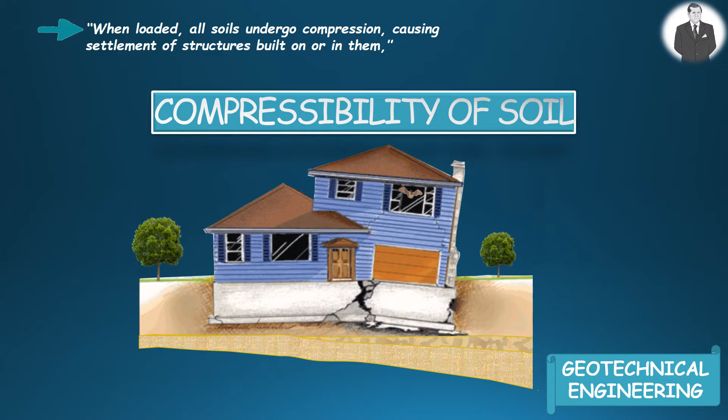With superimposed loading, soil layers experience a certain amount of compression due to several factors: the deformation of soil particles, expulsion of water and/or air from void spaces, and relocation of soil particles.

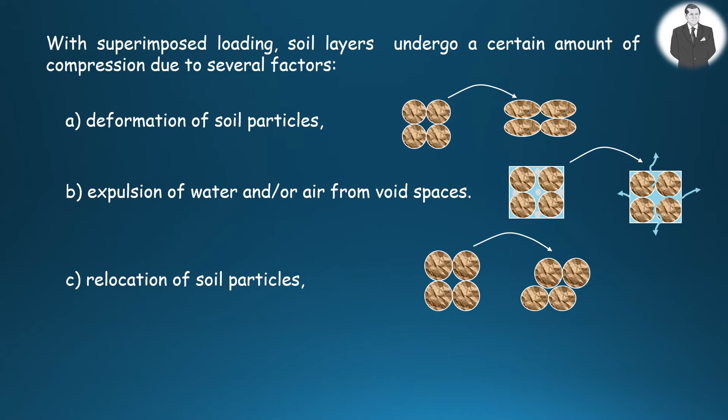Generally, soil settlement resulting from loading may be divided into three main categories: immediate or elastic compression, primary consolidation, and secondary compression.

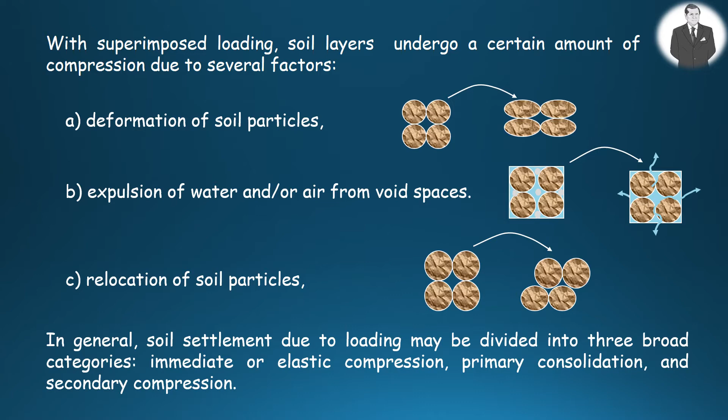Immediate settlement is owed to the elastic deformation of dry, moist, and saturated soils without any change in their water content. Immediate settlement calculations are usually based on equations derived from the theory of elasticity.

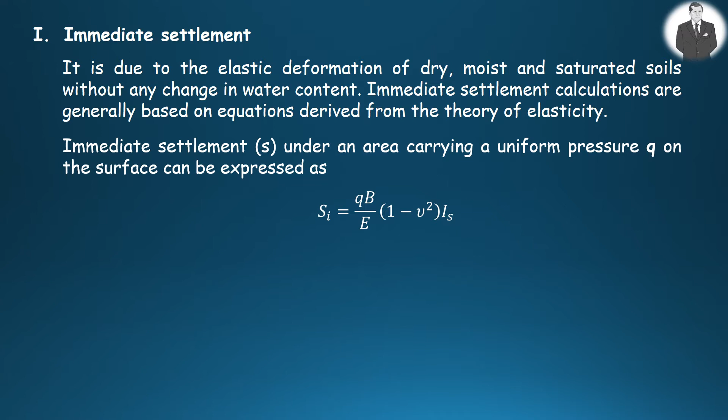Immediate settlement under an area bearing a uniform pressure on the ground surface can be obtained by this equation, where SI is the immediate settlement, Q is the uniform pressure acting on the ground surface, B is the width of the foundation or the diameter of circular foundation, E is the modulus of elasticity of soil, nu is the Poisson ratio, and IS is the influence factor depending on the shape of the loaded area.

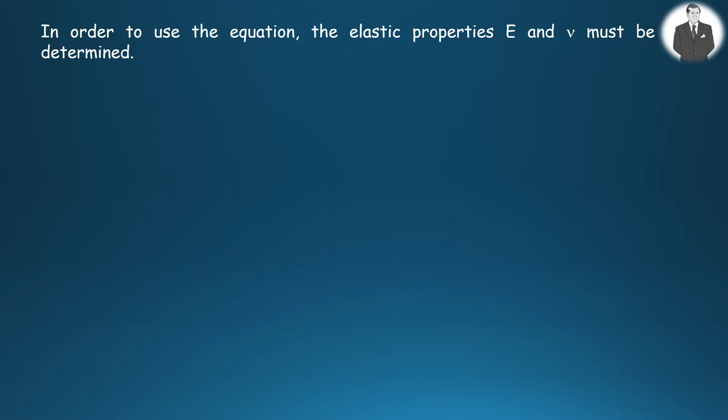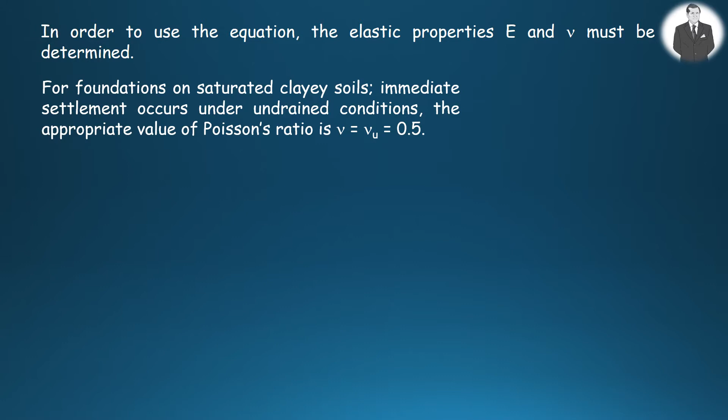To use the equation, the modulus of elasticity and the Poisson ratio must be worked out. For foundations resting on saturated clay soils, immediate settlement occurs under undrained conditions. The suitable value of Poisson ratio is then 0.5.

For other types of soils, typical values of Poisson ratio are presented in the table here. If you notice, it ranges from 0.2 to 0.5.

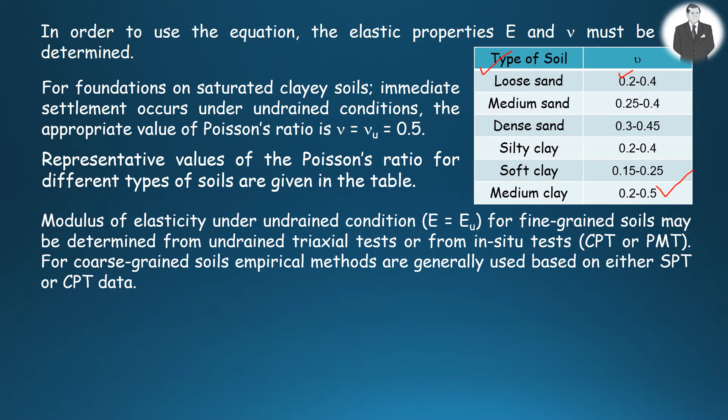Modulus of elasticity under undrained conditions for fine-grained soils may be determined from undrained triaxial tests or from in situ tests such as cone penetration test or pressure meter test. For coarse-grained soils, empirical methods are usually utilized based on either standard penetration test or cone penetration test data.

For most soils, the modulus of elasticity increases with depth, so use of a constant value of modulus of elasticity results in a conservative value.

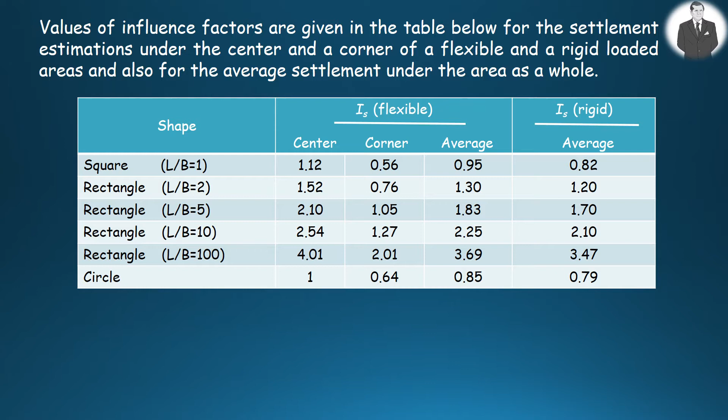For most cases in practice, simple settlement calculations are adequate on the condition that reliable values of soil parameters for the in situ soil have been obtained.

It should be appreciated that the precision of settlement predictions is much more affected by inaccuracies in the values of soil parameters than by shortcomings in the methods of analysis.

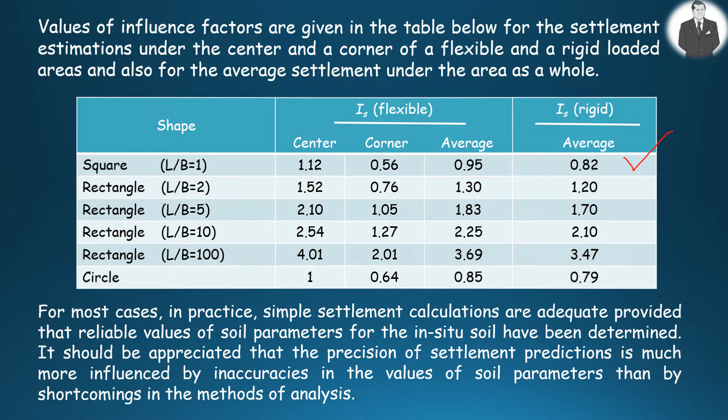Here is a practical example to illustrate how to calculate the immediate settlement, in other words, elastic settlement of foundation. A building foundation of 4 by 2 meters carrying a load of 1.2 meganewton is located at a depth of 3 meters in soil over a layer of clay 4 meters thick.

The value of modulus of elasticity under undrained condition for this clay layer is 50 megapascal. This layer is underlain by a second clay layer of 8 meters thick, for which the value of modulus of elasticity is 80 megapascal. The second layer is underlain by a rock layer.

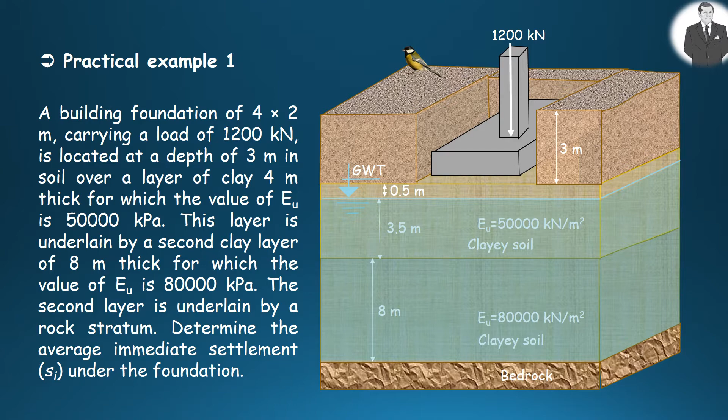You are asked to determine the average immediate settlement under the foundation.

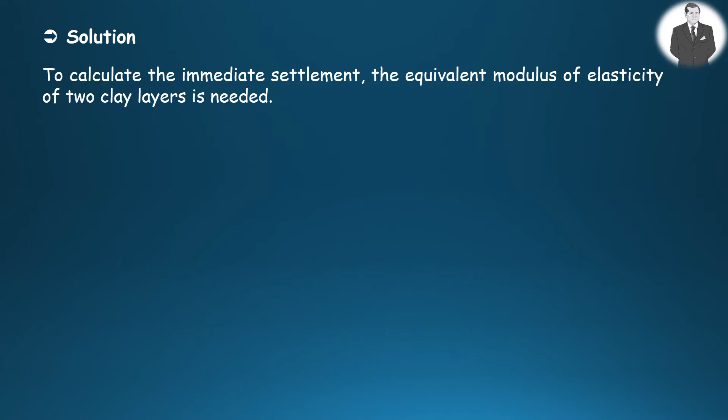This is 70 megapascal. Pressure at the base of the footing is the ratio between the load and the area of foundation, which is 150 kilonewton per square meter.

Since the clay soil layers are fully saturated, Poisson ratios for them can be taken as 0.5 as stressed earlier. To calculate the average immediate settlement, we need another parameter called influence factor, I sub S, as shown here.

This can be obtained from the related table shown earlier, based on the ratio between the length and the width of the foundation, which is 2. Now, putting all these related data into the equation as shown here, we can figure out the immediate settlement, which is about 4.2 millimeters.

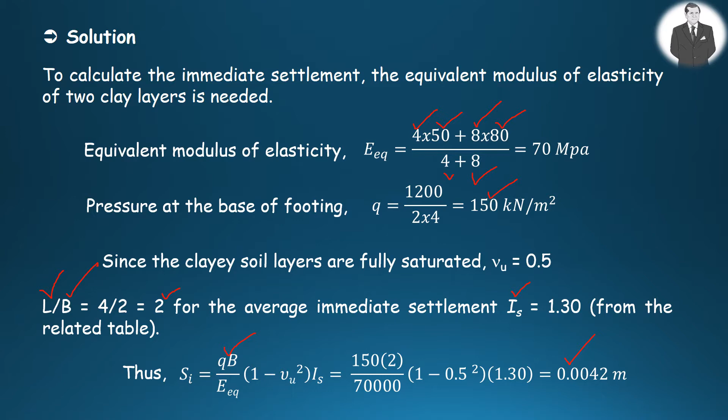Before learning how to calculate consolidation settlement, let us first understand the process of consolidation. Since soil is a multiphase system, a load applied to soil mass would be carried in part by the soil skeleton and in part by pore water. This sharing of the load can be typified by means of a simple analogy.

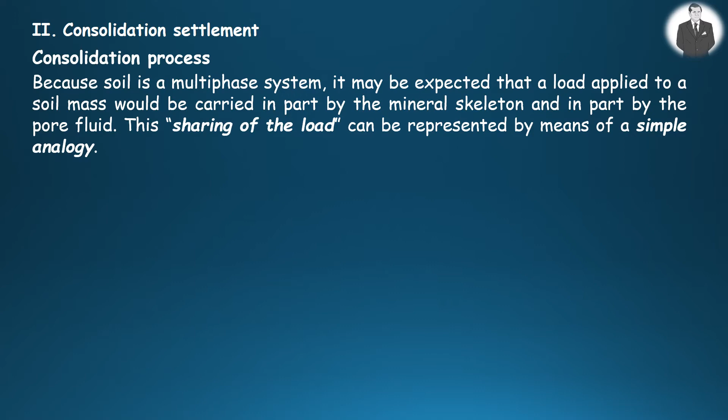As shown in the figure, the spring in the cylinder represents the compressibility of the soil skeleton, and the bore diameter of the valve represents the permeability of soil. The cylinder itself simulates the condition of no lateral strain in the soil mass.

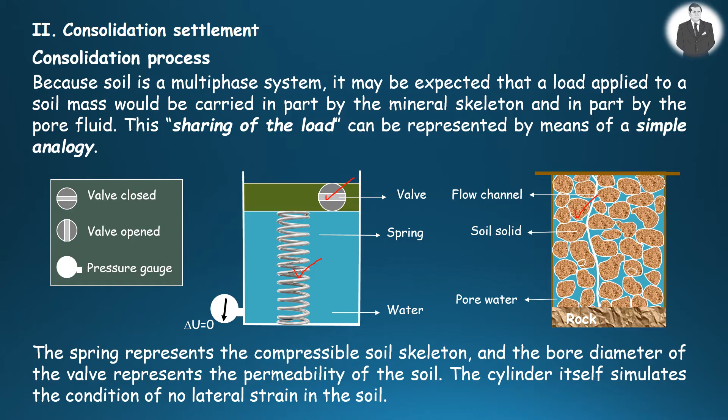Suppose a load is applied to the piston with the valve closed, as shown in figure A. The piston will not move as long as the valve is closed, and no load can be transmitted to the spring. The whole load will be carried by the water in the cylinder and none by the spring, because there is no drainage. This condition in the field is referred to as the undrained condition.

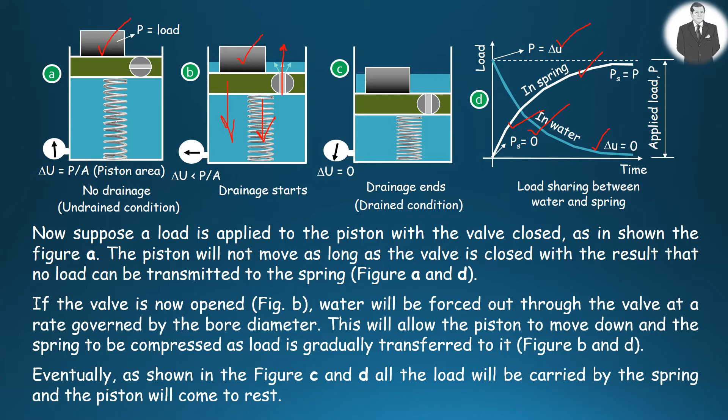Immediately after loading, there will be no drainage and no dissipation of excess pore water pressure, and therefore no transference of stress to the soil skeleton. Thus, the effective stress will be zero immediately after loading.

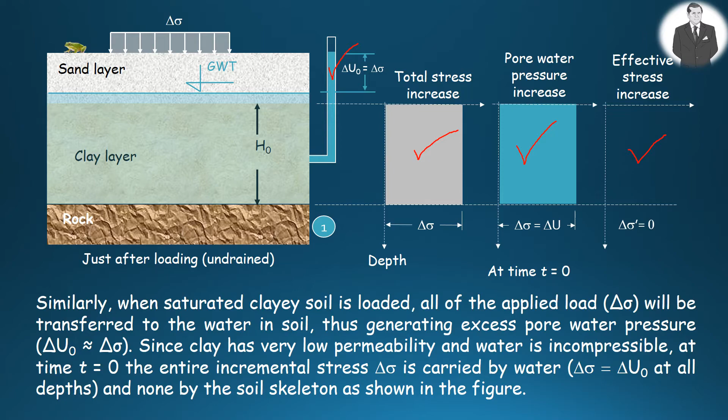With the lapse of time, which may take days, months, or even years, the excess pore water pressure will progressively reduce as the pressurized pore water flows out. While this happens, delta sigma will be gradually passed on to the soil particles, meaning that the effective stress increases, as shown in the figure here.

Nevertheless, the magnitudes of effective stress increase and excess pore water pressure at different levels will differ depending on the distance of the drainage path. In our case, there is only one-way drainage, at the top of the clay layer, and no drainage at the bottom because it is underlain by rock mass, which is impervious.

The excess pore pressures at upper levels of the clay layer are lower than those in the middle and at the bottom. Correspondingly, the effective stresses are higher at the upper levels but lower in the middle and at the bottom. This means that some of the stresses are passed on to the soil skeleton.

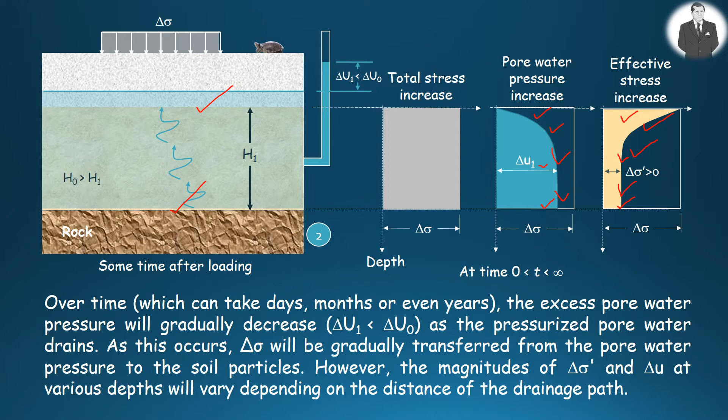Meanwhile, drainage continues and the settlement of the clay layer takes place slowly. Theoretically, at infinite time, when the excess pore water pressure is completely dissipated — in other words, when the pressurized pore water has entirely drained — the effective stress will increase by delta sigma, as illustrated in the figure. This means the stress acting on the ground surface is totally carried by the soil skeleton.

This progressive process of drainage under surface load application, and the related transmission of excess pore water pressure to effective stress, is the cause of time-dependent consolidation settlement in soil layers.

To estimate the settlement of clay layers in the field, a series of consolidation tests are performed in the laboratory using an oedometer, shown in the figure here. I will give you brief information about these tests. The details can be found in related textbooks or laboratory manuals.

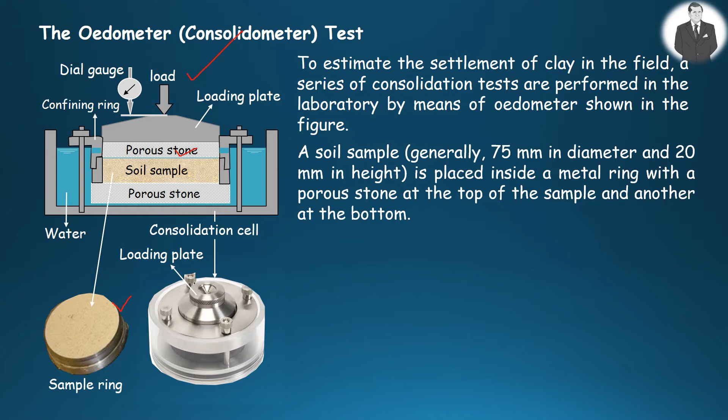A soil sample, usually 75 millimeters in diameter and 20 millimeters in height, is placed inside a metal ring as shown in the figure, with a porous stone at the top of the sample and another one at the bottom.

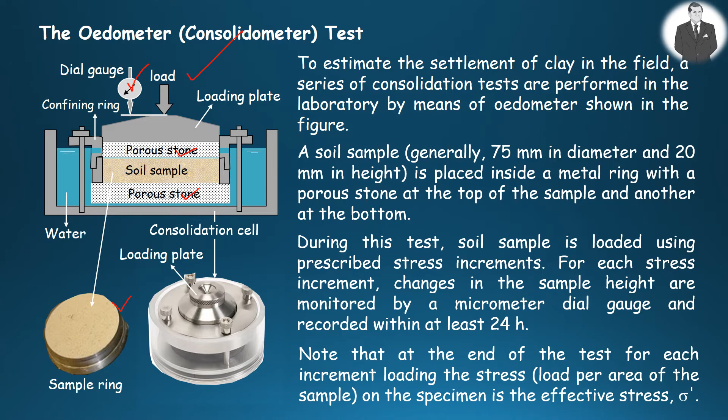During this test, the soil sample is loaded using prescribed stress increments. For each stress increment, changes in the sample height are monitored through a micrometer dial gauge mounted on the loading plate, as shown here, and recorded within at least 24 hours. It is important to note that at the end of the test, for each increment loading, the stress on the specimen is the effective stress.

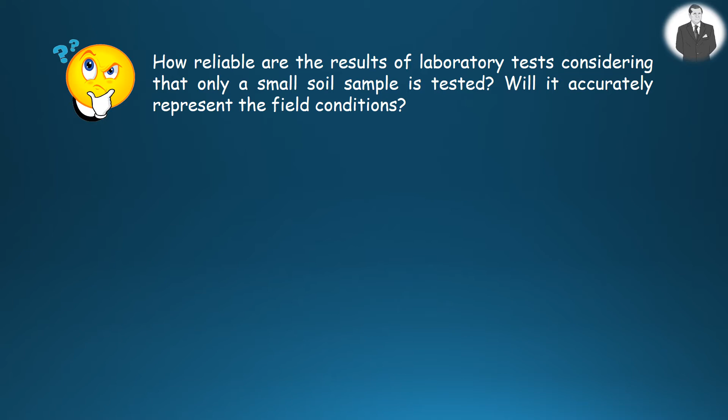The question is, how reliable are the results of laboratory tests, given that only a small soil sample is tested? Will it correctly represent the field conditions? Well, there is always apprehension about applying results from laboratory tests to solve large-scale field problems.

Engineering practice shows that the results obtained from laboratory tests may be very different from the field data. The problem results from the size of soil samples tested. Small laboratory samples do not generally represent the presence of larger voids or inclusions of other materials, which are prevalent in the field.

Let's get back to the subject. In a consolidation test, the void ratio at the end of each increment period can be computed from the displacement readings and either the water content or the dry weight of the sample at the end of the test.

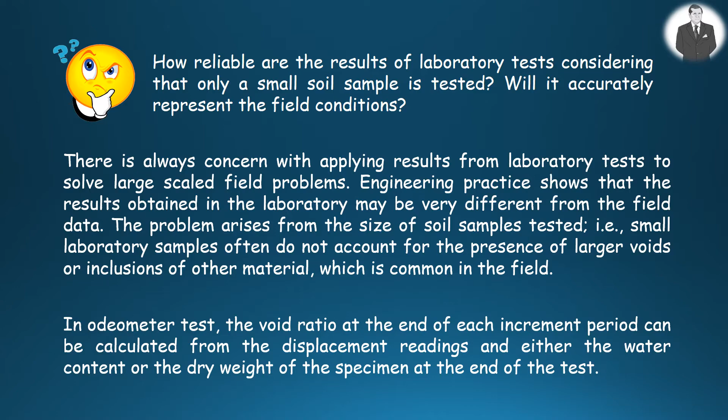E sub 0 is the initial void ratio at the beginning of testing, which is equal to E sub 1 plus delta E. E sub 1 is the void ratio at the end of the test. Remember that at the end of the test, the soil sample is still fully saturated, so the degree of saturation in this case is equal to unity. E sub 1 then can easily be obtained by W sub 1 times GS.

The laboratory data from oedometer tests are plotted as the effective stress versus void ratio using a logarithmic scale, as shown in the figure. If you notice, the curve consists of three parts: the recompression part, the linear part, and the unloaded-reloaded part.

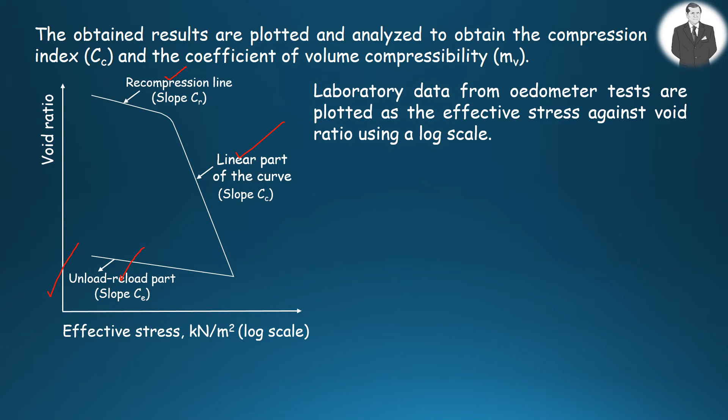The recompression part accounts for the soil disturbance. When the soil is removed from a certain depth in the field, there will be stress relief. Now, the compression index is obtained from the linear and steep part, which is also called the virgin compression line of the experimental curve. Let us consider two points, namely A and B, on the linear part of the curve.

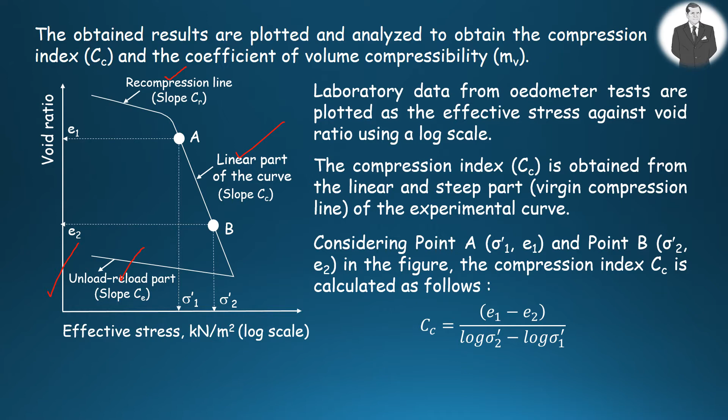The compression index is then defined as the ratio between delta E, which is the difference between void ratios corresponding to A and B, and log delta sigma prime, which is the difference between effective stresses corresponding to A and B points. If a soil is overconsolidated, it will be represented by a point on the unloaded-reloaded part of the E log sigma prime plot.

By the way, what is meant by overconsolidated soil? If the present effective stress is the maximum to which the soil has ever been subjected, the clay is said to be normally consolidated. On the other hand, if the effective stress at some time in the past has been greater than the present one, the soil is said to be overconsolidated.

The maximum value of effective stress in the past divided by the present value is defined as the overconsolidation ratio. A normally consolidated soil has an overconsolidation ratio of unity. Overconsolidated soil has an overconsolidation ratio greater than unity. The overconsolidation ratio can never be less than 1.

Overconsolidation is generally the result of geological factors, for example, the erosion of overburden due to glacier motion, wind, wave, or ocean currents, the melting of ice sheets and therefore reduction in stress after the glaciation, or permanent rise of the water table.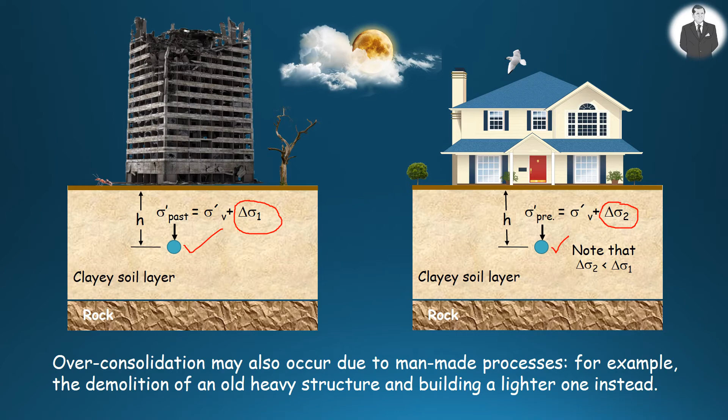Considering a point at depth H as shown in the figures, there is no change in the vertical effective stress due to self-weight of soil, but there is a change in the stress increase due to surface load. The stress increase delta sigma 1 due to a heavy structure is greater than the stress increase delta sigma 2 due to a lighter structure. In this case, the soil layer is said to be overconsolidated.

How can the maximum effective vertical stress that has existed on the soil in the past be known and found out? The maximum past effective overburden pressure is also named the pre-consolidation pressure. There is a simple graphic construction suggested to determine the pre-consolidation pressure from the laboratory E log sigma prime plot.

The procedure is as follows: initially we need to draw the E log sigma prime plot as shown in the figure based on the laboratory test results. The first step is, by visual observation, determine the point A of maximum curvature on the AB part of the E log sigma prime curve. Second step, draw a horizontal line through point A.

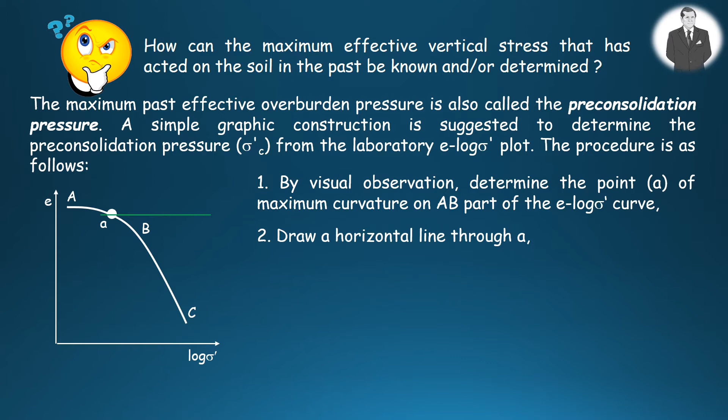The third step, draw the tangent to the curve at point A. The fourth step, bisect the angle between the tangent and the horizontal through point A. The fifth step, produce back the straight line part BC of the curve to intersect the bisector. And finally, draw the vertical through the point of intersection of the bisector to obtain the value of sigma C prime. That's it.

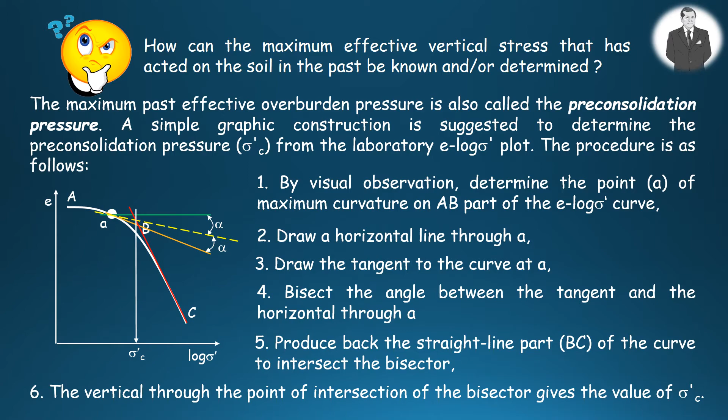Whenever possible, the pre-consolidation pressure for an overconsolidated clay should not be exceeded in construction. If it is exceeded, then the compression will be large.

Now the question is, what is the engineering approach to deal with consolidation in practice? There are two main important questions which engineers need to find solutions for. The first one is, what will be the maximum settlement? And the second one, how long will it take? The following sections will discuss how to calculate soil settlements and time of consolidation.

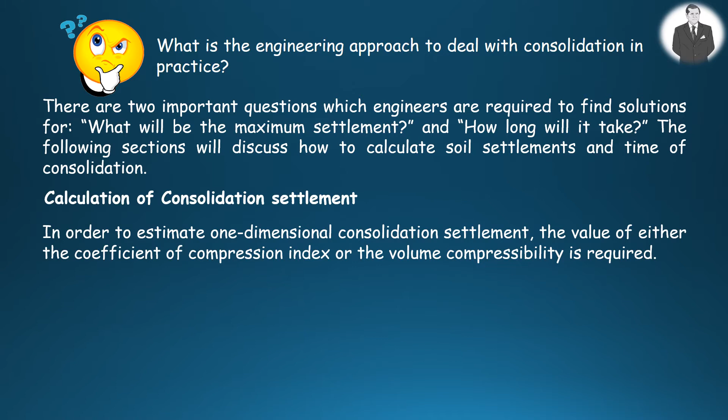Let us consider a site comprising a normally consolidated soil, on which we wish to construct a structure, and assume that the increase in vertical stress due to the structure in the middle of the soil layer is delta sigma. In this case, the final vertical stress will be sigma 0 prime plus delta sigma. Sigma 0 prime is the effective vertical stress due to self-weight of soil in the middle of the soil layer.

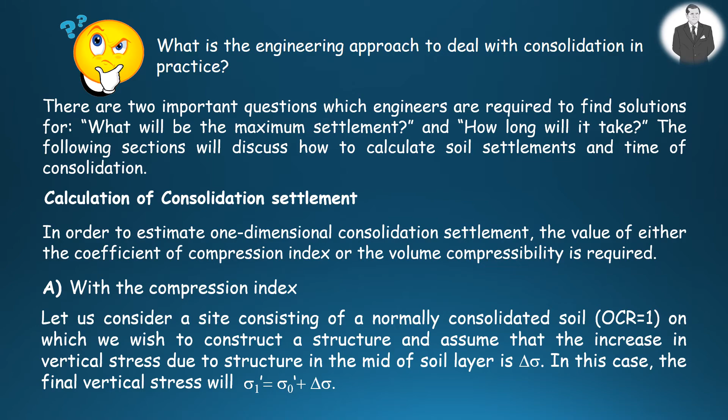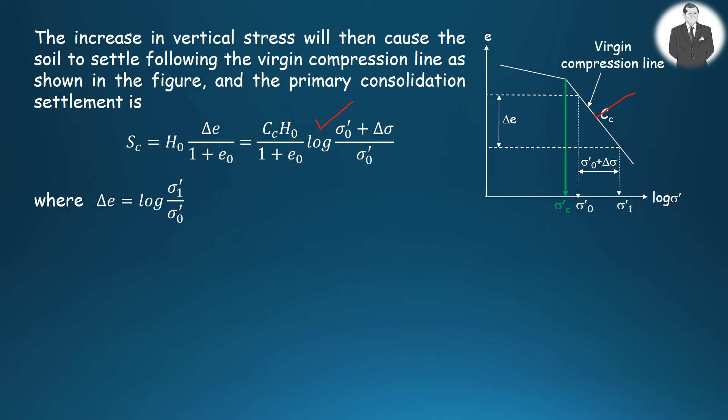The increase in vertical stress will then lead to soil settlement following the virgin compression line as shown in the figure. The primary consolidation is then obtained by the equation given here, where delta E is equal to log sigma sub 1 prime over sigma sub 0 prime.

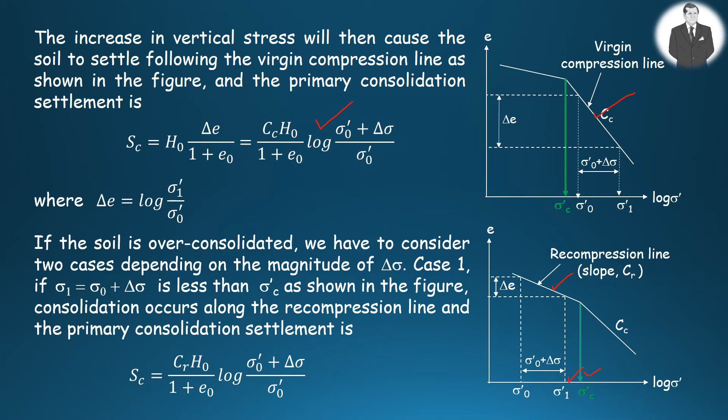If, on the other hand, the soil is overconsolidated, we have to consider two cases based on the magnitude of delta sigma. Case 1: if sigma sub 1 is less than the pre-consolidation pressure, as shown in the figure here, then consolidation occurs along the recompression part, and the primary consolidation in this case is obtained by the equation given here.

H sub 0 is the initial thickness of the soil layer subjected to consolidation. Sigma sub 0 prime is the initial effective stress in the middle of the soil layer before structural load. Delta sigma is the stress increase in the middle of the soil layer due to structural load, and sigma sub 1 prime is the final effective vertical stress in the middle of the soil layer after structural load. Delta E is the difference between the initial and final void ratios before and after structural loading.

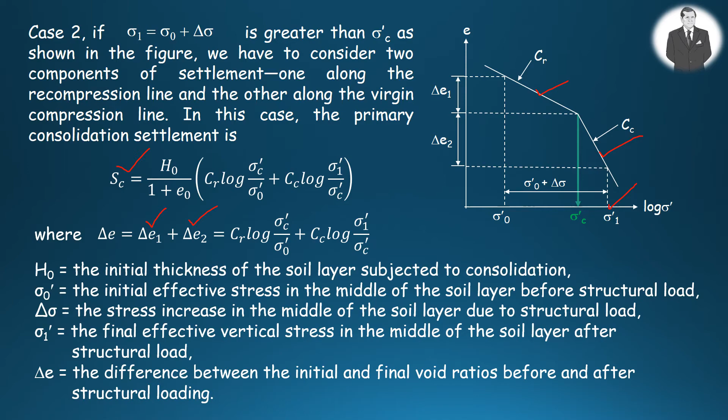In the calculation of primary consolidation settlement, you may need to follow a procedure outlined here. The first step is to calculate the current vertical effective stress and the current void ratio at the center of the soil layer for which settlement is needed.

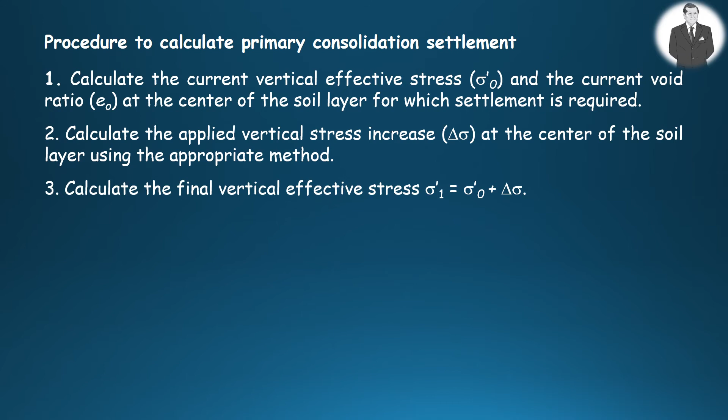The second step is to compute the applied vertical stress increase due to surface load at the center of the soil layer using the suitable method. The third step is to calculate the final vertical effective stress, which is equal to present vertical effective stress plus the stress increase due to surface load. The fourth step is to compute the primary consolidation settlement.

If the soil is, on the other hand, over-consolidated, in this case, the primary consolidation settlement can be computed using the equation given here. Notice that instead of Cc, we use Cr, which is the slope of the recompression part of the E log sigma prime plot, because the pre-consolidation pressure in this case is greater than the present vertical effective stress.

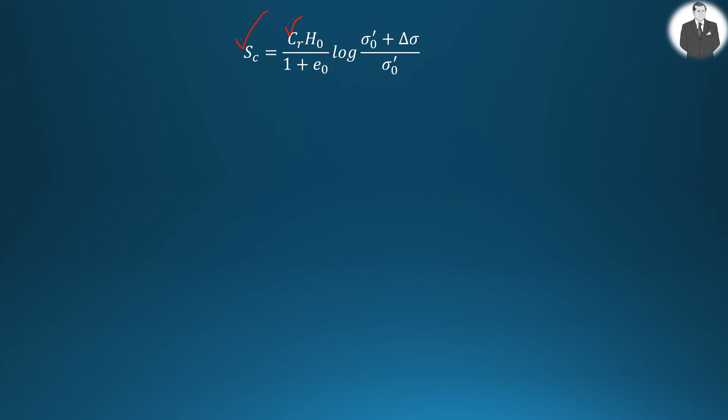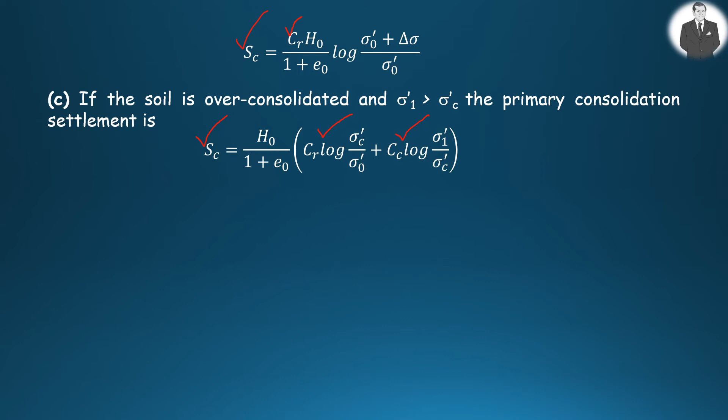If the soil is overconsolidated and the final effective vertical stress is greater than the pre-consolidation pressure, the primary consolidation settlement can be calculated using the equation given here. In this equation, we have two parts, namely the recompression part and the virgin compression part of the E log sigma prime plot.

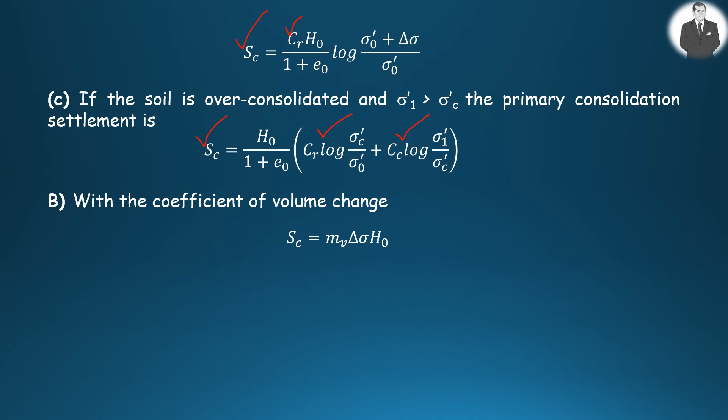It is also possible to calculate the primary consolidation settlement by using the coefficient of volume change. In this equation, H sub 0 is the initial thickness of the clay layer, and delta sigma is the change in vertical stress that brings about consolidation.

Although compression index is constant, the coefficient of volume change varies with stress level. To take into account the variation of coefficient of volume change and delta sigma with depth, the graphical procedure can be adopted to calculate the primary consolidation settlement.

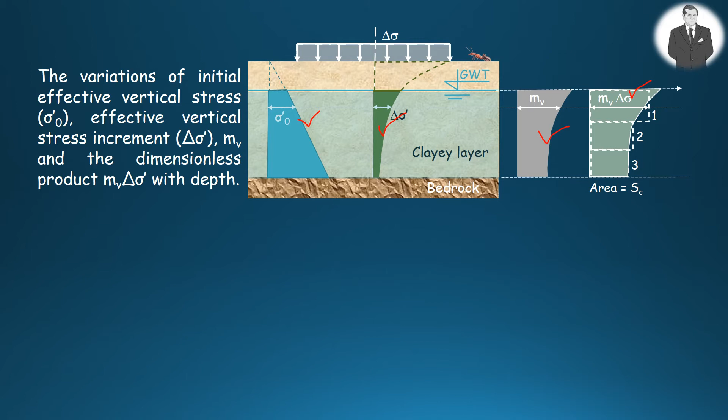In the figure here, you see the variations of initial effective stress increment, the coefficient of volume change, and the dimensionless product of m sub v times delta sigma prime with depth.

In an alternative way, the layer can be divided into sub-layers, and the product m sub v times delta sigma prime can be determined at the center of each sublayer. Each product is then multiplied by the suitable sublayer thickness to obtain the sublayer settlements. The settlement of the whole layer is then equal to the summation of the sublayer settlements.

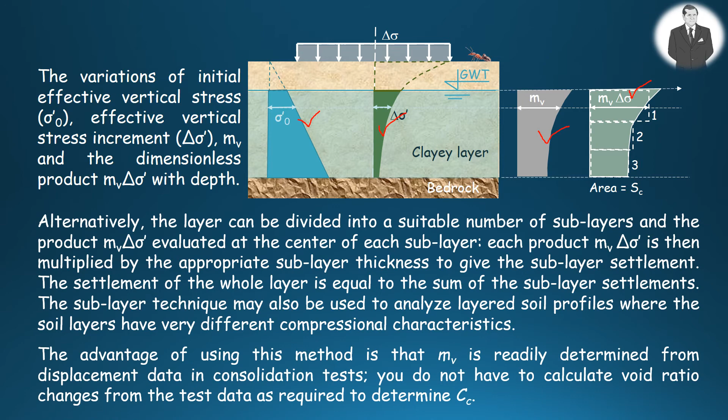This technique may also be used to analyze layered soil profiles where the soil layers have different compressional properties. The advantage of using this method is that the coefficient of volume change is readily determined from the displacement data in consolidation tests.

So you don't need to calculate void ratio changes from the test data as needed in the determination of compression index.

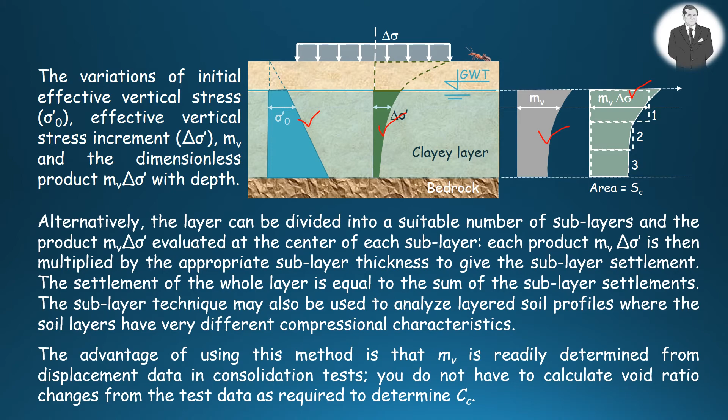Secondary compression settlement is the change in the volume of soil resulting from the readjustment of the soil structure after the primary consolidation has ended.

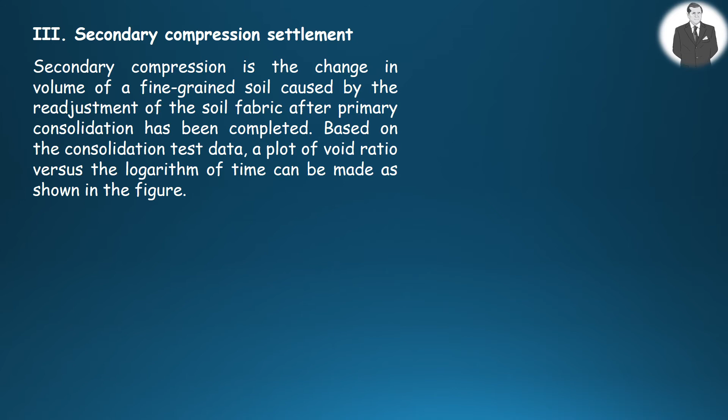Based on the consolidation test data, a plot of void ratio versus the logarithm of time can be made as illustrated in the figure. Now, the primary consolidation is assumed to end at the intersection of the projection of the two straight parts of the curve as you see in the figure.

Now then, the secondary compression index is defined as the slope of the secondary compression part between selected time intervals. Thus, the secondary compression settlement can be computed by means of the equation given here.

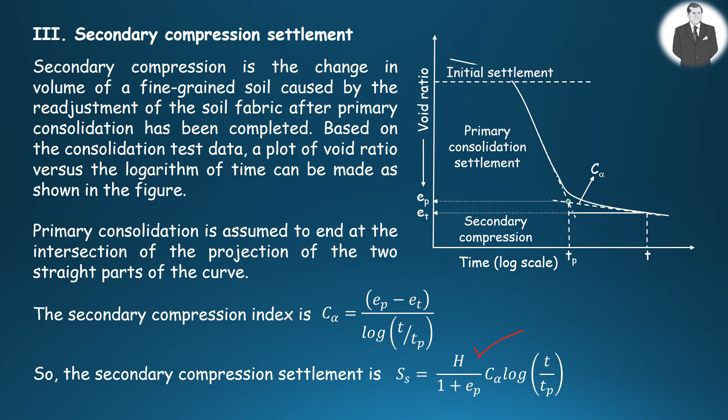Where E sub P is the void ratio at the end of primary consolidation, E sub T is the void ratio at time T on the secondary compression part, H is the thickness of the clay layer at the beginning of secondary consolidation, and T is the time at which secondary compression is needed.

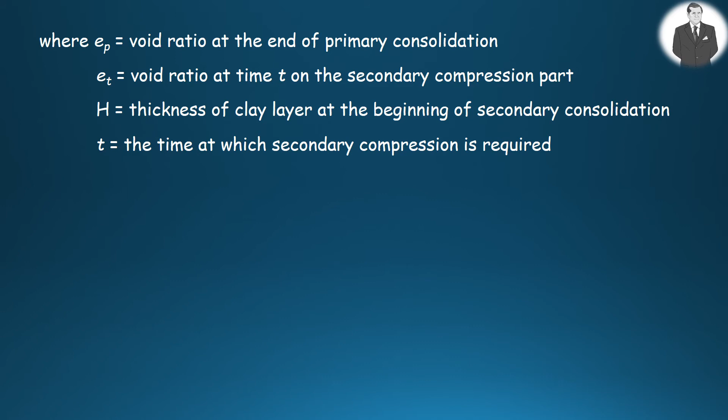The total settlement of a foundation can then be given as the summation of elastic settlement, primary consolidation settlement, and the secondary compression settlement.

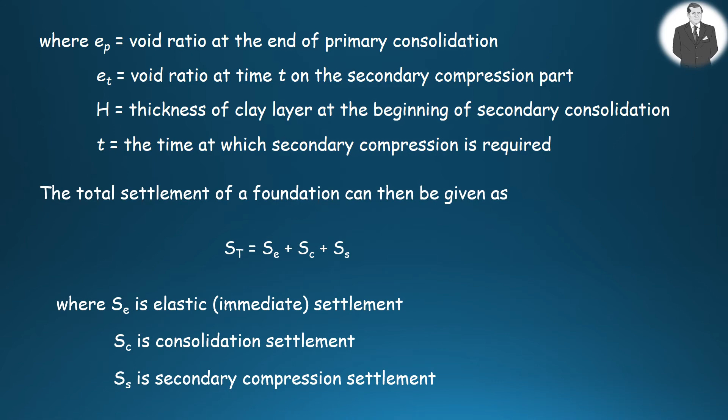The building's raft foundation is rectangular, with a width of 30 meters and length of 60 meters. The laboratory tests conducted on soil samples collected from the middle of soil layers at site through boring reveals the following data.

The unit weights of sand above and below the groundwater level are 16 kilonewton per cubic meter and 18 kilonewton per cubic meter respectively. The saturated unit weight of the alluvial clay is 17 kilonewton per cubic meter.

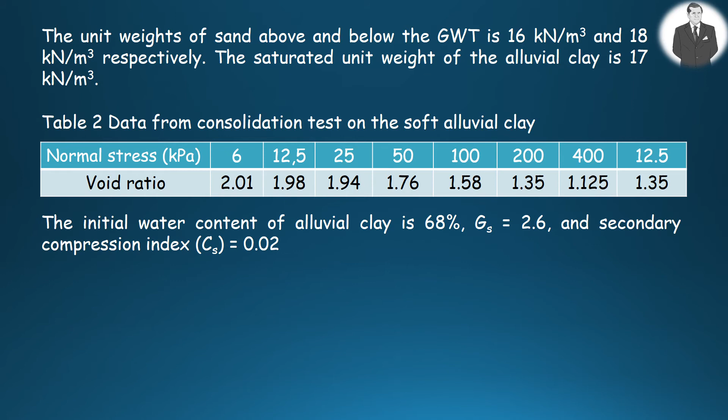Table 2 shows data from the consolidation test run on the soft alluvial clay. The initial water content of the clay layer is 68%, the specific gravity is 2.6, and the secondary compression index is 0.02.

Question 1: What would be the primary consolidation settlement in the clay layer caused by the construction of the hospital building? Question 2: What would be the total settlement of the clay layer 10 years after the completion of primary consolidation settlement? Note that the time for completion of primary consolidation settlement is 2 years.

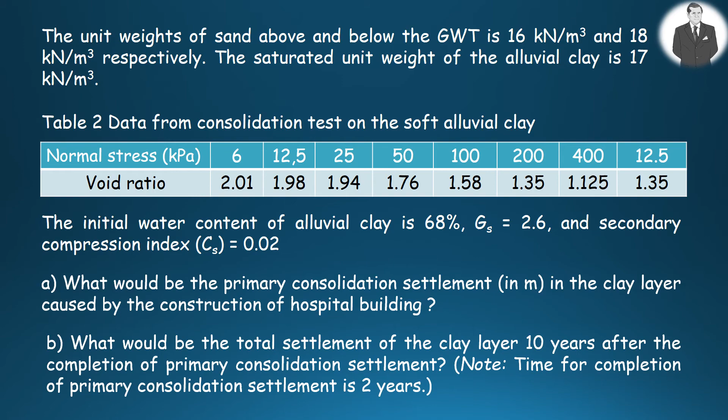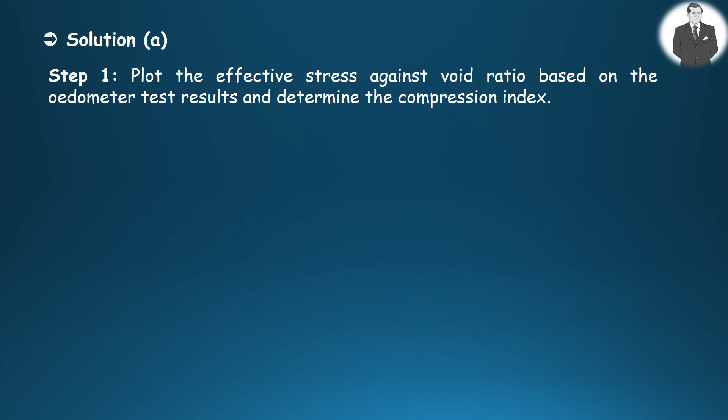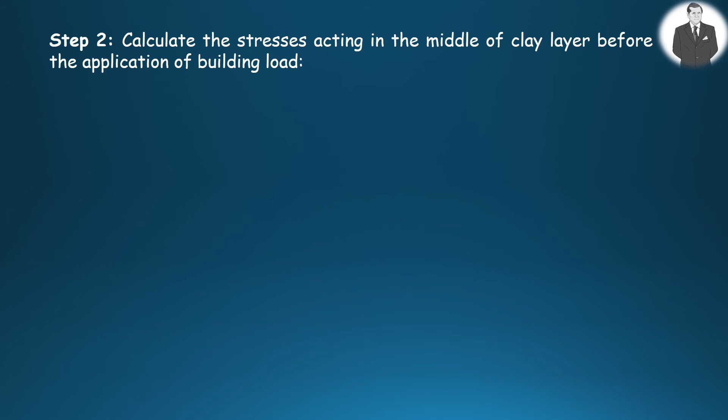The second step is to calculate the stresses acting in the middle of the clay layer before the application of the building load. So the total vertical stress in the middle of the clay layer is equal to the thicknesses of soil layers times their unit weight. The total stress in this case is obtained as 76.5 kilonewton per square meter.

Pore water pressure is an easy one, which is calculated as 34.3 kilonewton per square meter. The vertical effective stress in the middle of the clay layer is equal to total stress minus pore water pressure, which is about 42.2 kilonewton per square meter.

The third step is to figure out the initial void ratio, which is equal to the water content of soil times its specific gravity divided by the degree of saturation. Since the clay soil is fully saturated, the degree of saturation is equal to unity. In this case, the initial void ratio can be calculated as 1.77.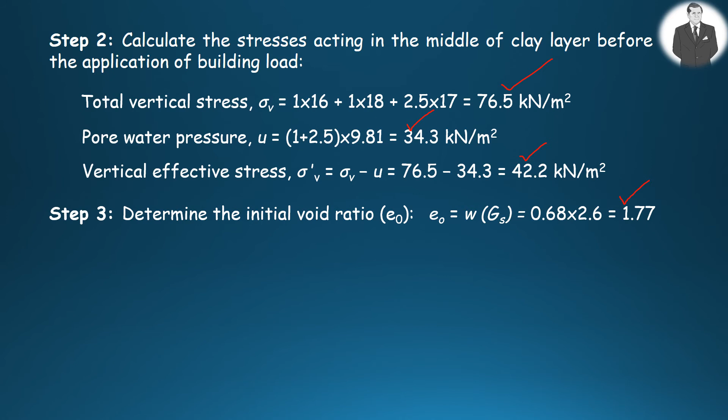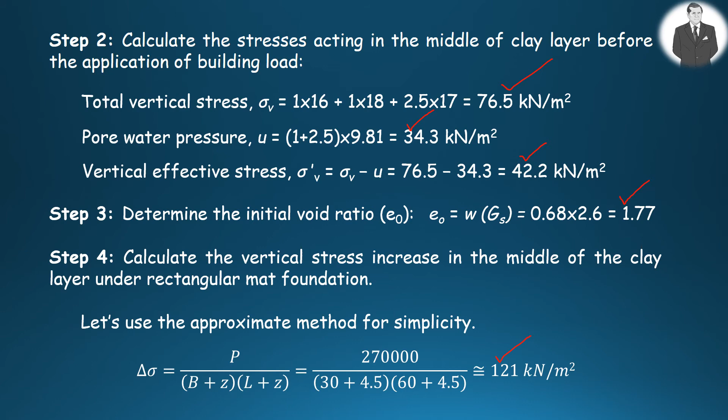The fourth step is to compute the vertical stress increase in the middle of the clay layer under the rectangular raft foundation. For this, you can use the Boussinesq approach, but for simplicity, let us use the approximate method, which is the 2-to-1 method. With this approach, the stress increase due to the hospital building in the middle of the clay layer can be obtained as 121 kilonewton per square meter.

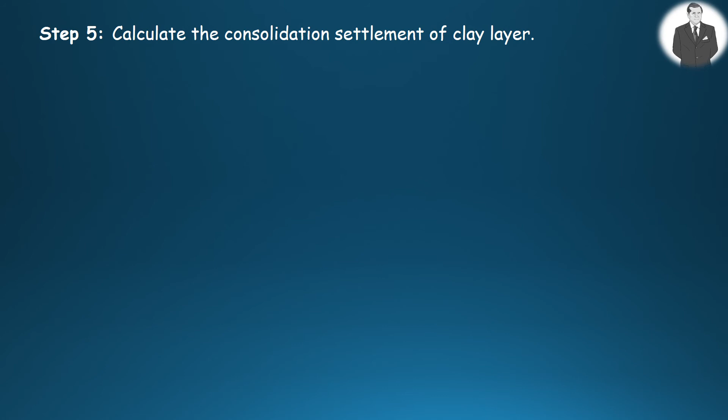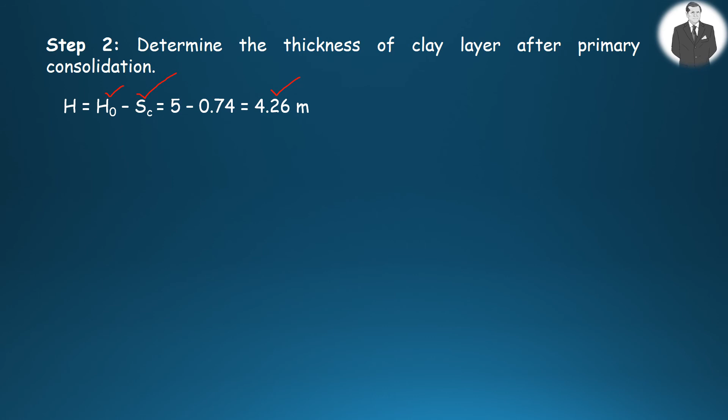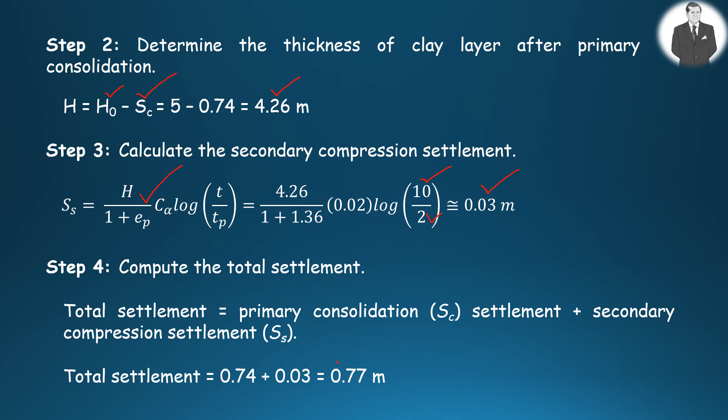In the third step, the secondary compression settlement is computed based on the equation given here. The secondary compression period for the settlement calculation is 10 years, and the completion of primary consolidation settlement is 2 years. Other values are already given and calculated, so based on these, the secondary compression can be calculated as 0.03 meter. Finally, the total settlement can be obtained by the summation of primary consolidation settlement and secondary compression settlement, which is about 0.77 meter. Notice that the secondary compression settlement is very low compared to the consolidation settlement.

So is the elastic settlement. So these two are generally ignored in practice. So the main concern is the primary consolidation settlement.

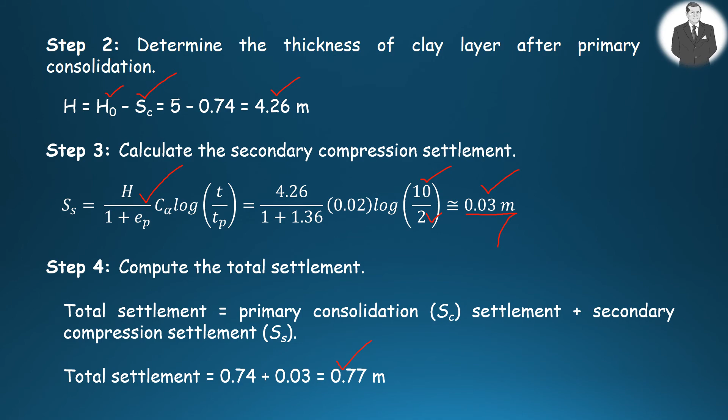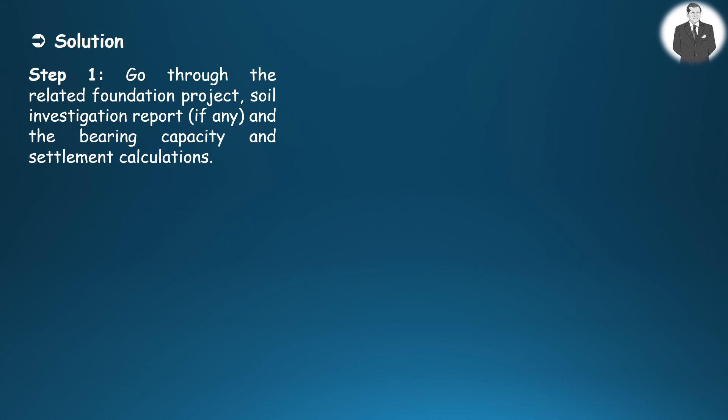In the solution of this problem, the first step is to go through the related foundation project, soil investigation report if any, and the bearing capacity and settlement calculations. After careful examination, it was decided that the available data was not enough and a detailed soil investigation was needed.

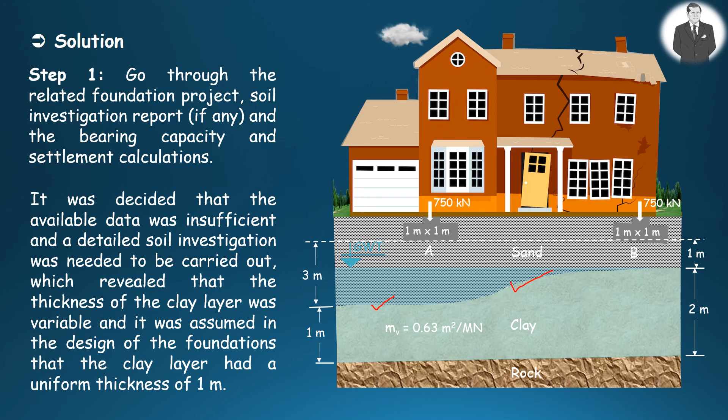The soil investigation revealed that the thickness of the clay layer was variable, as shown in the figure. It was assumed in the design of the foundations that the clay layer had a uniform thickness of 1 meter.

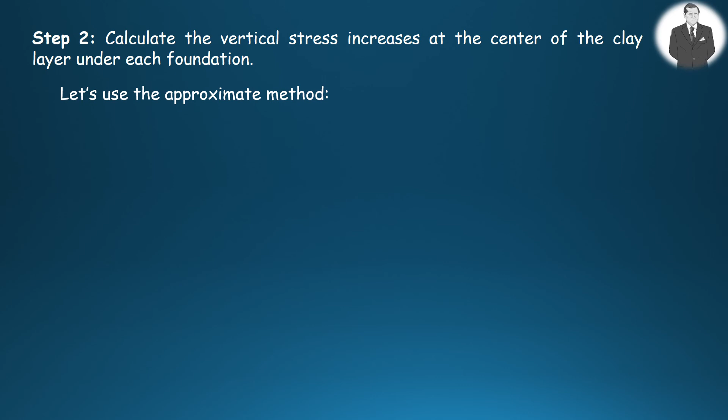In the second step, the vertical stress increases in the middle of the clay layer under each foundation are computed. For these, let us use the approximate method illustrated before. Based on this approach, the stress increase beneath foundation A and foundation B are 37 kilonewton per square meter and 83 kilonewton per square meter respectively.

In the third step, the primary consolidation settlements under each foundation are calculated based on the given value of the coefficient of volume compressibility. Based on this approach, the settlements beneath foundation A and B are 0.023 meter and 0.105 meter respectively. In the final step, the expected total differential settlement is the difference between the settlements of foundation A and foundation B, which is about 82 millimeters.